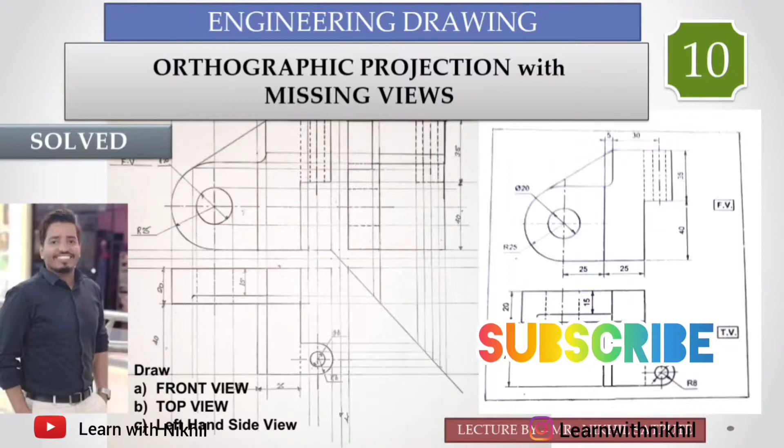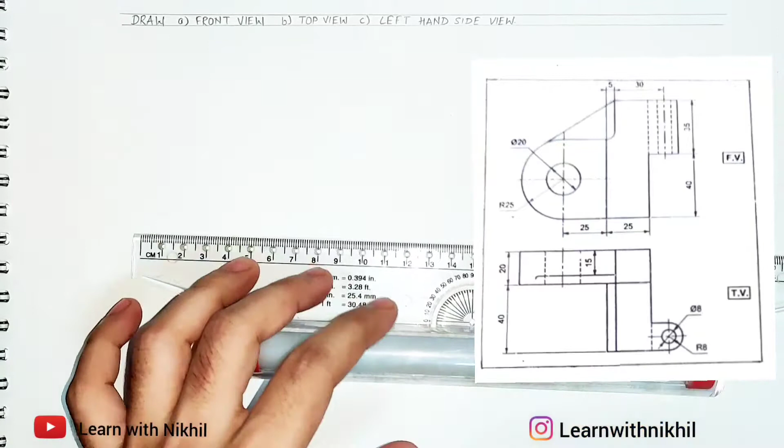So here we have taken another sum on orthographic projection where we have been given the front view and the top view. We have to draw its side view. So the total height required to draw the front view is 40 plus 35, that is 75 millimeter, and the total width required to draw the front view is radius of the outer semicircle, that is 25, plus 25 plus 5 plus 30 plus the radius of the outer semicircle, that is 8. So the total width required is 93 millimeters.

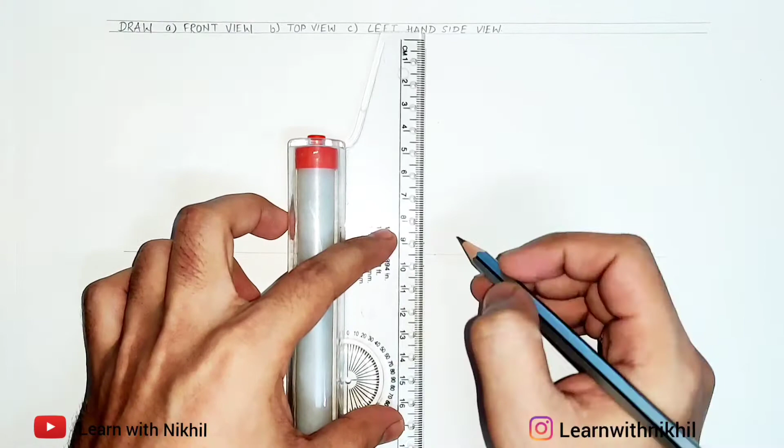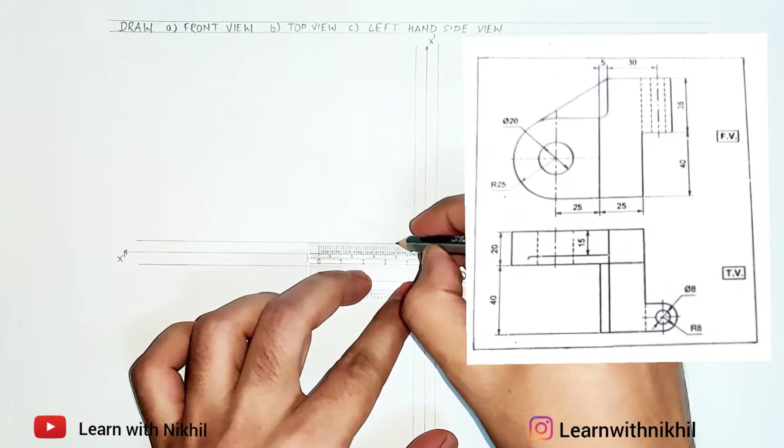So as we know the dimensions, we can draw the axis xy, x dash y dash axis, and the 5 millimeter above axis, which are the base to draw the views. So left side will be the front view. As we have to draw the left hand side view, the view will be on the right hand side. So here we are drawing the front view. First, the dimensions I have marked, that is radius 8, then 30 plus 5 plus 25 plus 25, which we have already calculated. Through those points, we'll draw parallel lines.

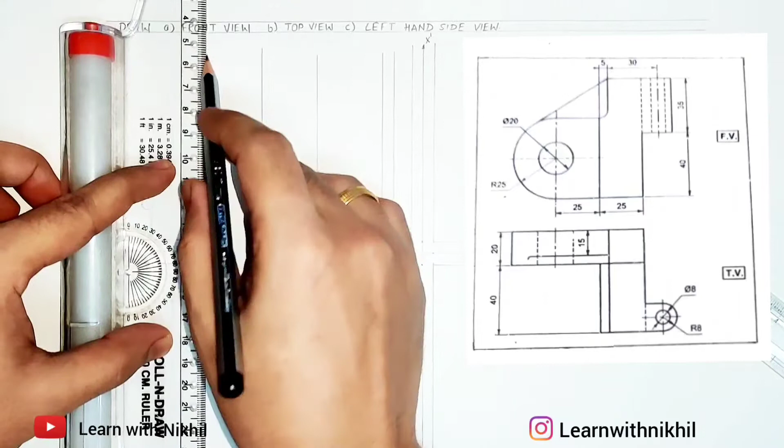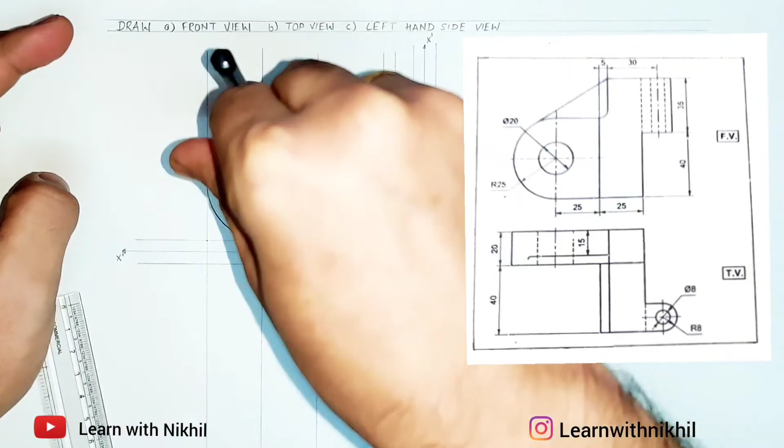Now first we'll draw the semicircle of radius 25 millimeter. So on compass 25 millimeter, we'll keep the pointer on the base, then we'll mark the center point, and through that point we'll draw the semicircle. We'll extend the dark line through this point. The line extended will be till here. We'll draw the line, dark line from here also.

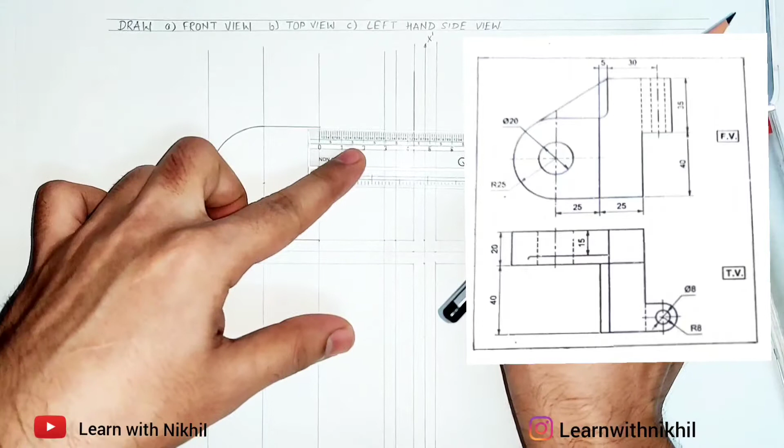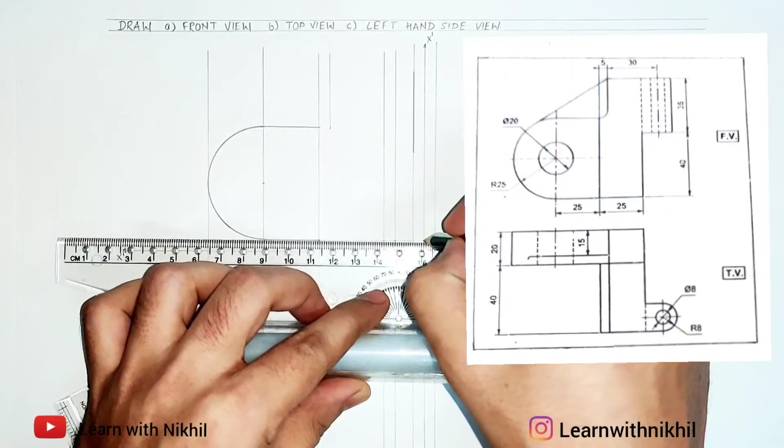Now from bottom, we'll mark a point above, that is 40 millimeter, and through that point we'll mark one more point above, that is 35 millimeter. So this is the total height. We'll make the dark line of 35 millimeter as given in the question. Now we'll draw the curve part. The radius of the curve will be 5 millimeter. So I'll mark a point 5 millimeter apart. We'll draw a light line through it. We'll draw a line from here also.

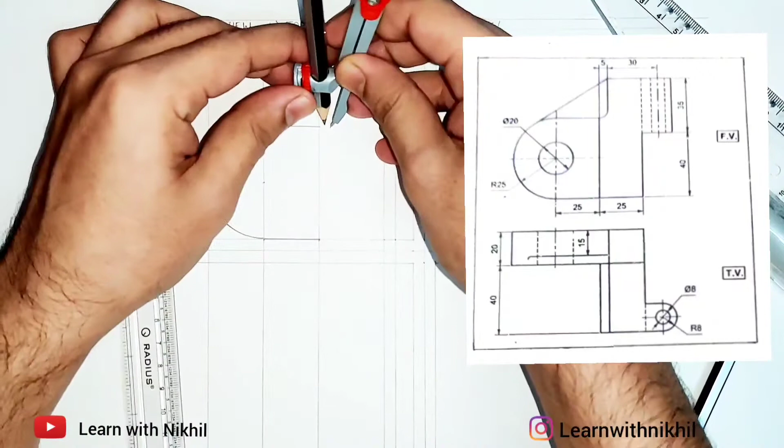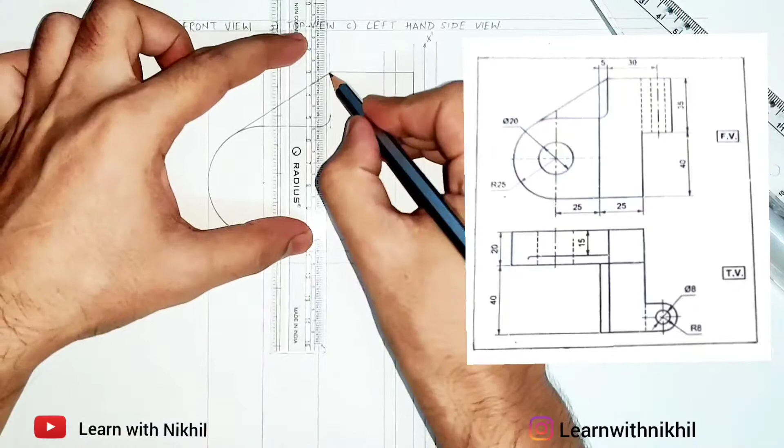We'll draw a slant line touching at the tangent of this semicircle. So arrange your scale like a tangent and draw the slant line. I will draw the curve of radius 5. So this distance is 5 millimeter. We'll mark the center point. So keep it here. Mark the center point above. And from that center point, draw the curve. Make this line dark. From here, extend the line. So as given in the question, mark the remaining lines. So we are almost done with the front view.

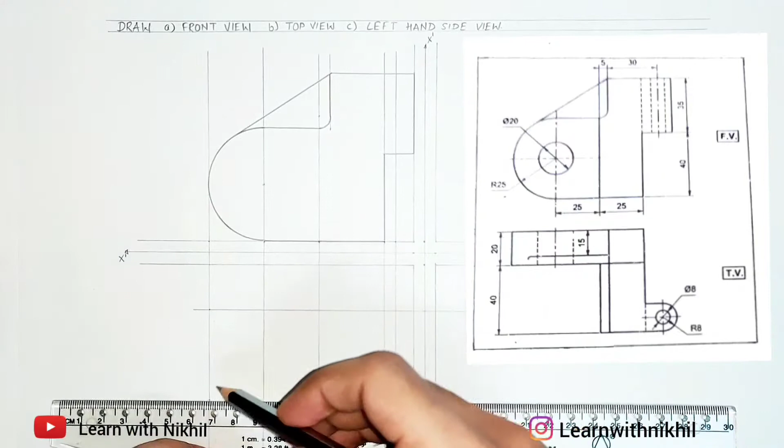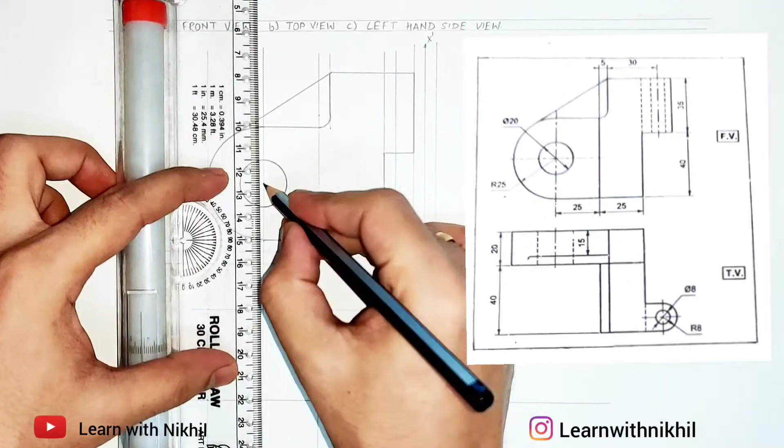For the top view, this distance is 20 millimeter. Below that 40 millimeter. We'll draw parallel lines through them. In the front view, we have to draw the circle of diameter 20. So radius as 10 millimeter. Keeping the center point here, we'll draw the circle. Take the projections from the circle below, edges of the circle. Now make this part dark as we have given in the question.

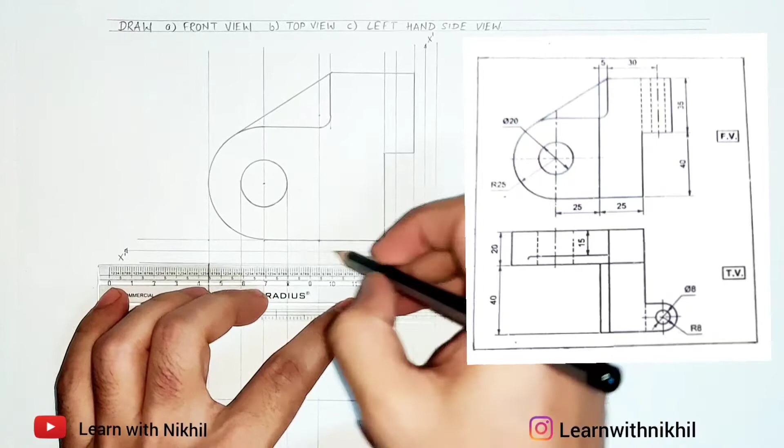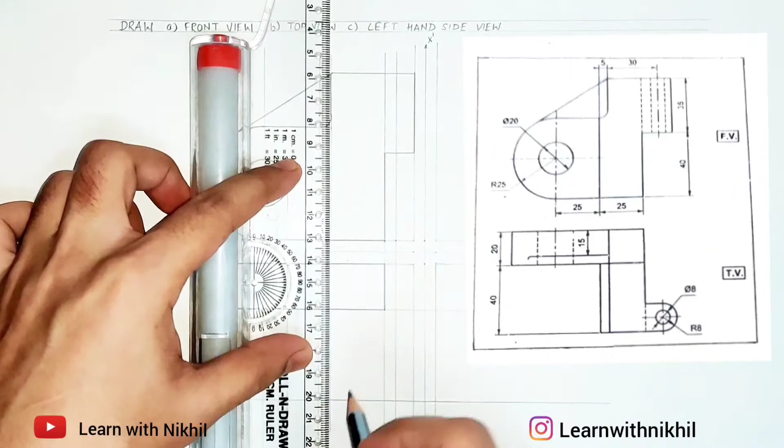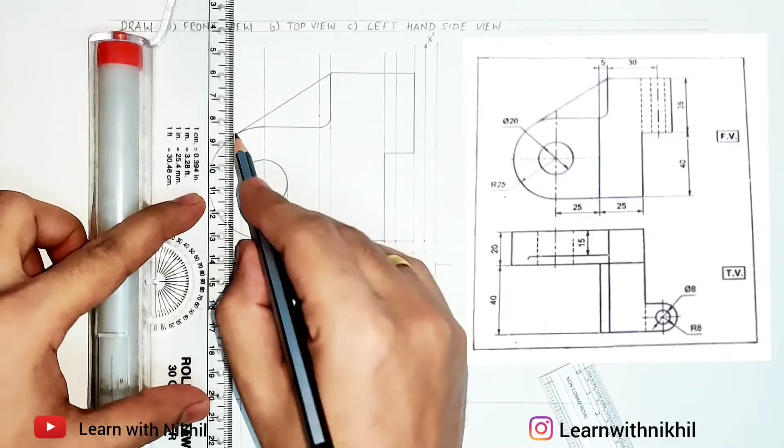Now this curve, you have to take the projection downward. Make this part dark. This part dark. This curve line from the top view looks like a rectangle shape. Also take the projection of this slant line attached at the tangent. So the distance of 15 I have marked, and this line is the slant line from the top view, and it is attached to the slant line which is attached to the tangent, and make a curve there.

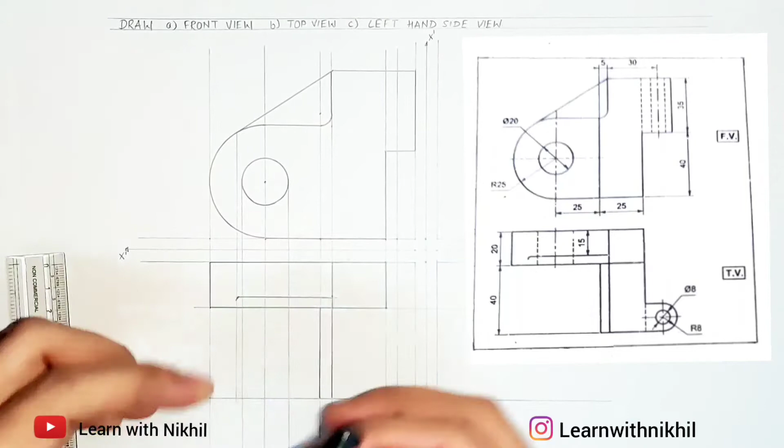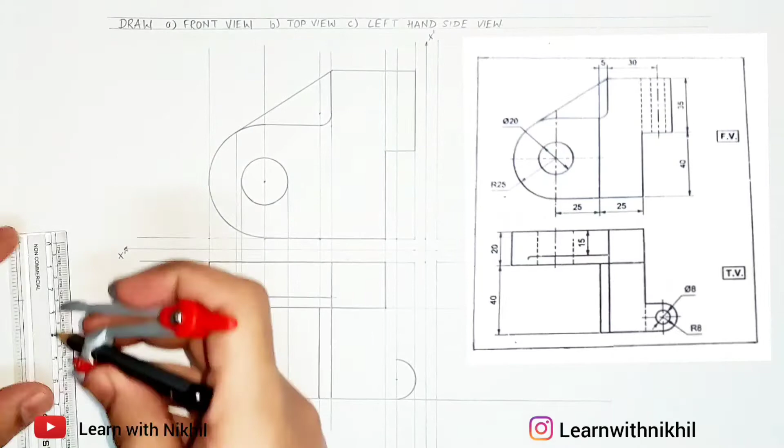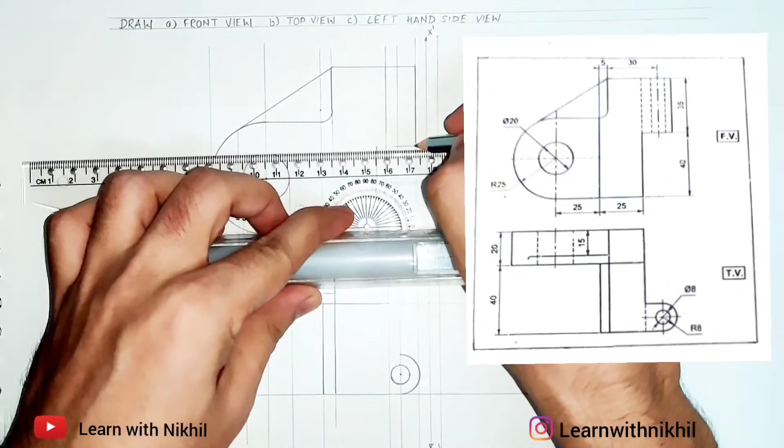Now from here we have to draw the semicircle of radius 8. So we have marked the center point above. Draw the semicircle. Also we have to draw the circle of diameter 8, so radius 4. Draw the circle. Now this line I have to erase, as this distance is 25. I have extended till 30 by mistake. So I'll erase that line and draw a line same but at a distance of 25. So just put that line back, and this part will be dark.

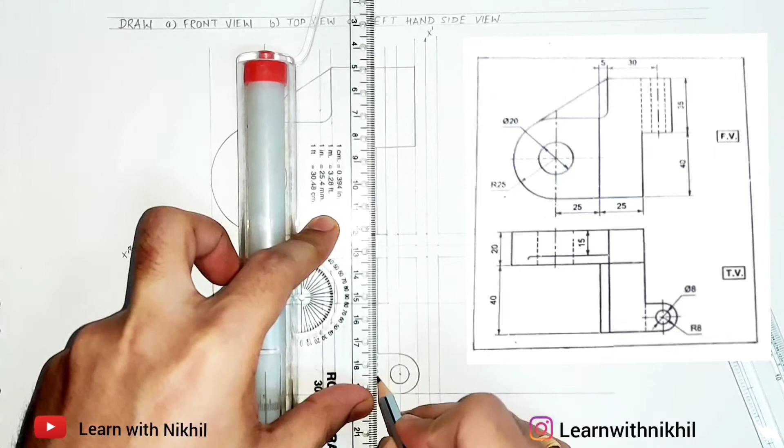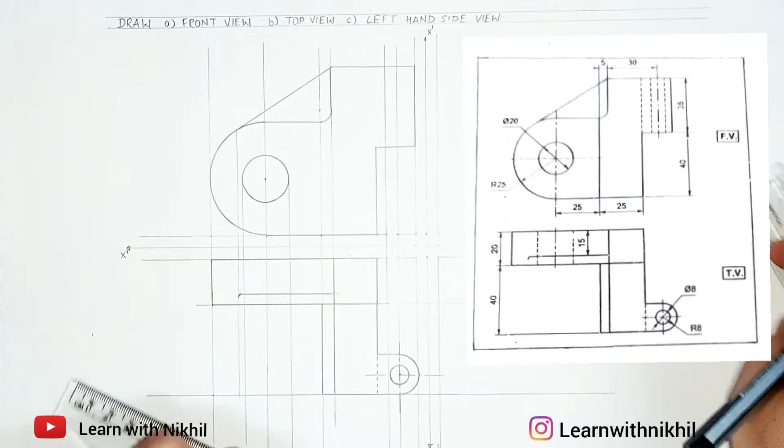Now as per the question, extend this line till here. Join this. This part will be dotted. So as the front view, this part is also hidden. So I am drawing it dotted. Circle center line. The inner circle of diameter 8 will be hidden upward. So that part also will be dotted.

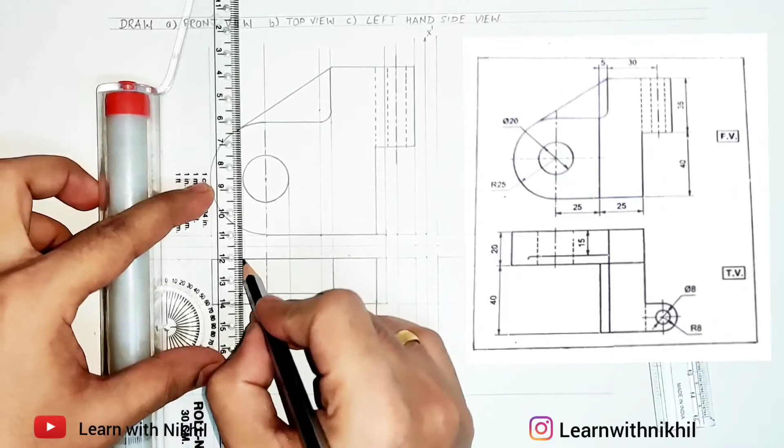Drawing the circle center line. This circle, inner circle, will also be hidden here. So we'll be drawing it dotted. So with this we are done with the front view and the top view. Now to draw the side view, first I have marked the dimensions for the front view and the top view. I have taken the projections from the front view and the top view to the side view.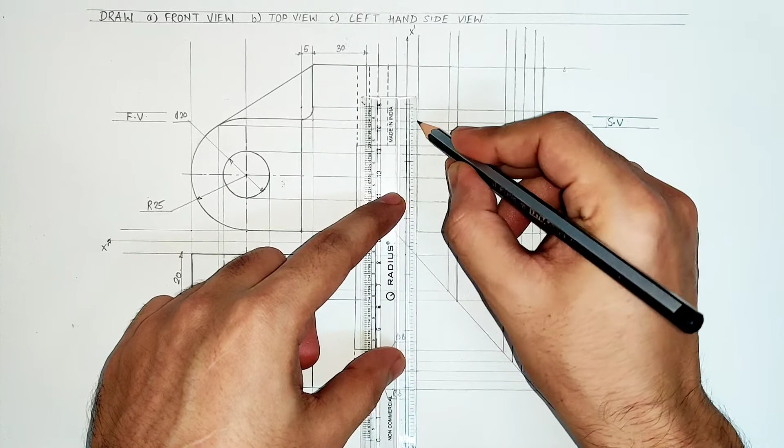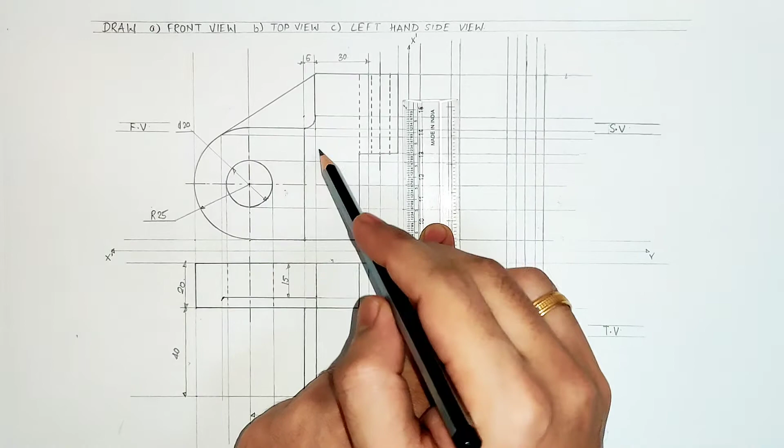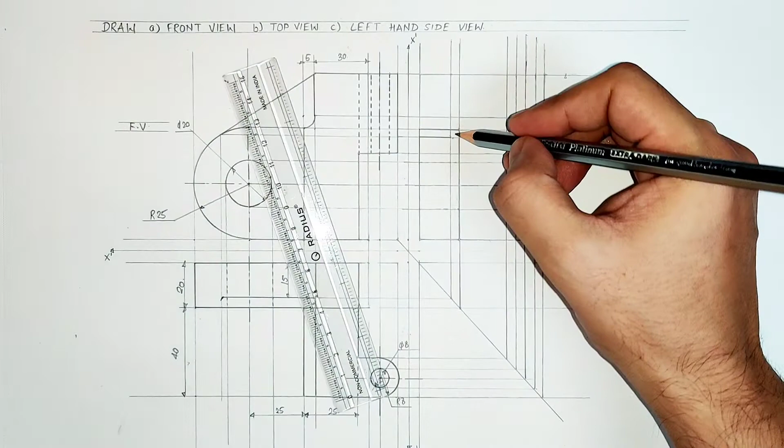Now first, this semicircle will be visible from the side view. So the width is from the top view and the height is from the front view. Now there is a slant line attached to the semicircle. As you can see, the width, this is the slant line, it is attached till here, and this is its projection. So till there the line will be dark and the semicircle upper edge will be dotted, so it will be hidden. Now this is the outer edge of the semicircle, and this is the edge which is hidden behind the slant line. So this part I'll make it dotted later.

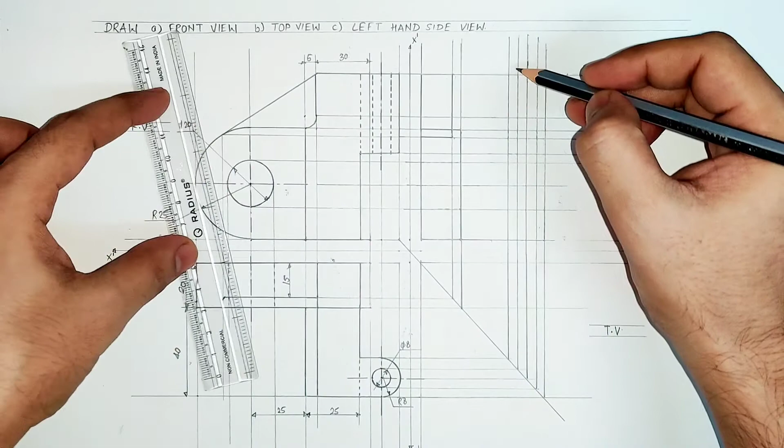Now I'll draw the slant line. It will start from here and it will extend upward till the top. So this is the slant line. Looks like a rectangle from the side view. This is the whole slant line, and as you can see, the semicircle upper edge, this edge is hidden. So I'll draw this dotted. But as you know, the width of the slant line is less than the width of the semicircle. So the little part is dark and the remaining part is dotted.

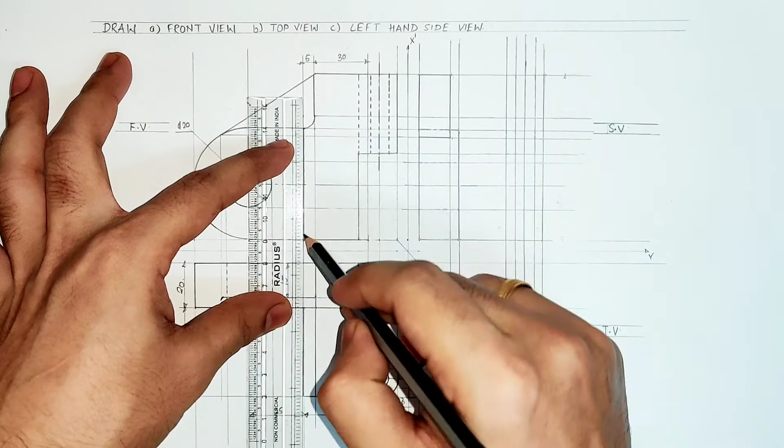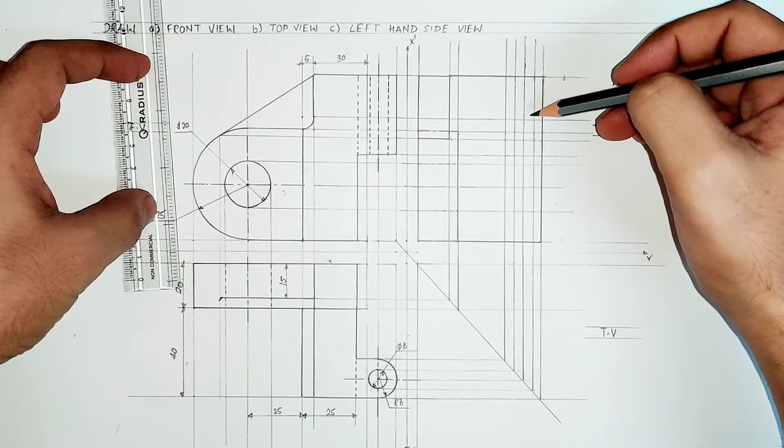Now drawing this part. This is outwards like this. First I'll draw this whole box. So that outward part totally blocks the remaining part which is behind. So this semicircle and the circle part is totally hidden. So this is the outer edge of the semicircle. This will be dotted. Height is from the front view and the width projection we have taken from the top view. Now this is the center line.

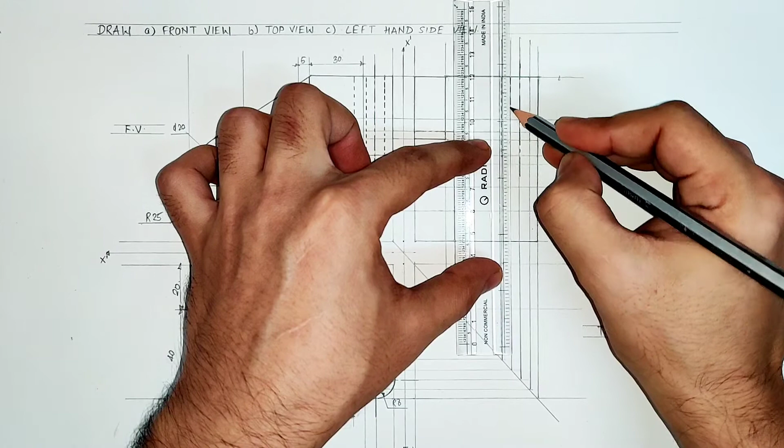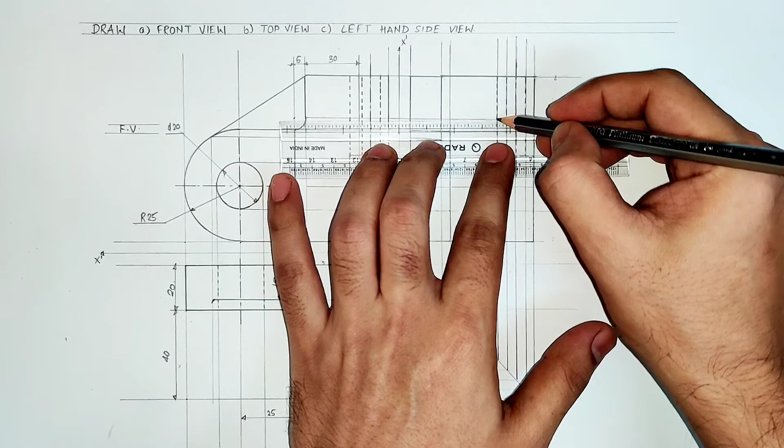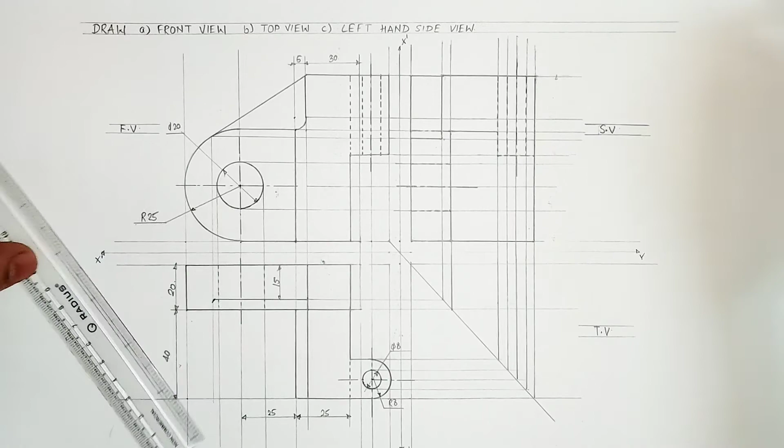I am drawing it big gap, small line, gap, big line, and this is the outer edge of the smaller circle. These all are hidden. This line will also be dotted. Now this part, the curve part, will draw two dark lines. Now this circle is hidden over here, so I'll draw this dotted. I'll draw the center circle line. And we are done with the side view. Just marking the final dimension. We have already marked the dimension.